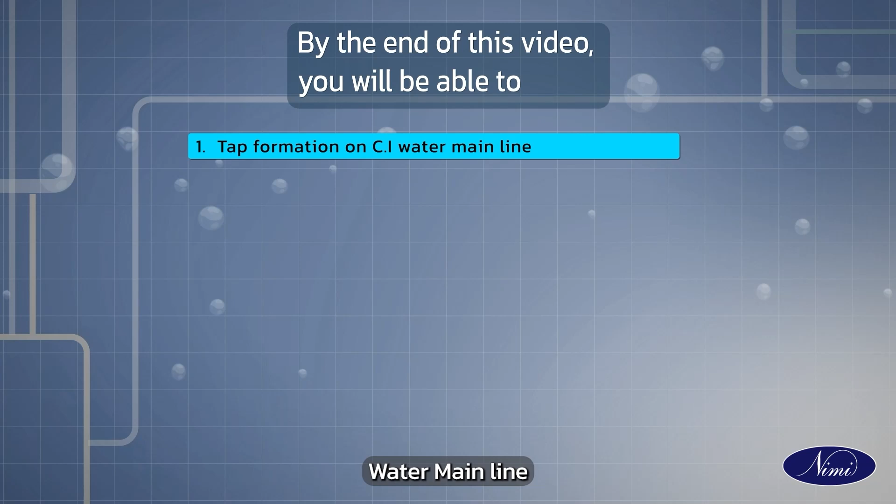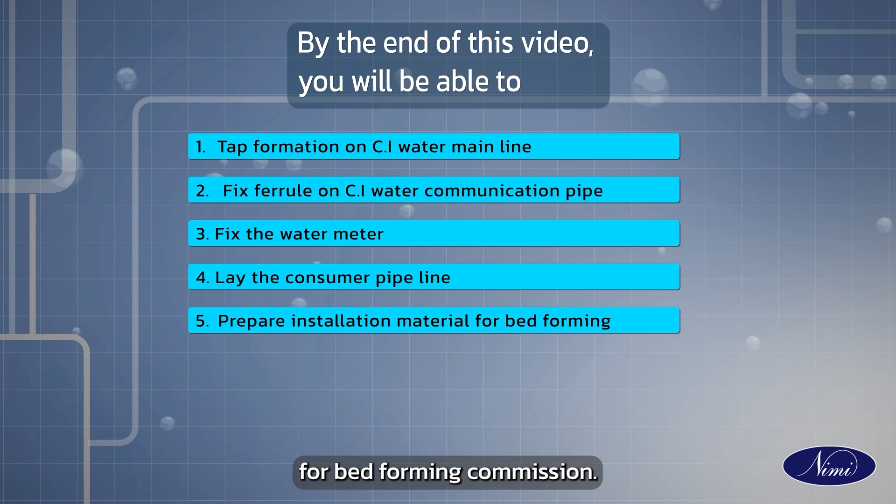fix a ferrule on the CI water communication pipe, fix the water meter, lay the consumer pipeline, prepare installation material for bed forming, commission the centrifugal pump and motor onto the bed, connect the suction line and delivery line,

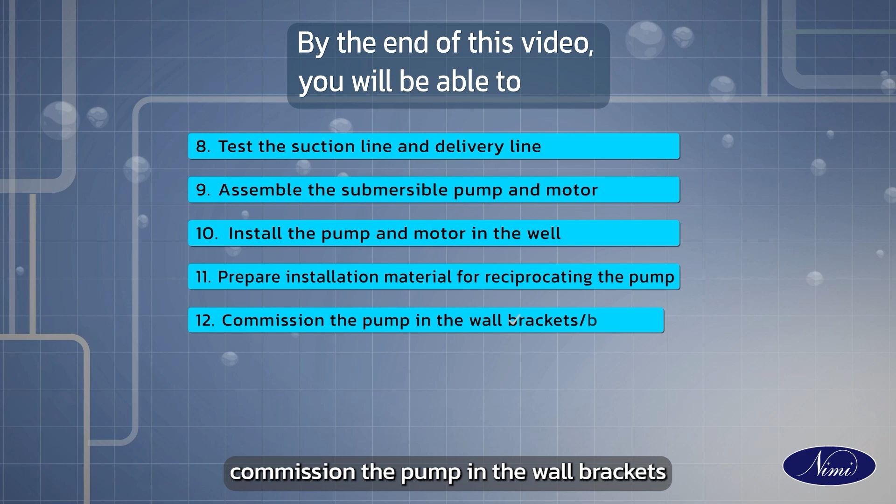test the suction line and delivery line, assemble the submersible pump and motor, install the pump and motor in the well, prepare installation material for reciprocating the pump, commission the pump in the wall brackets or bed.

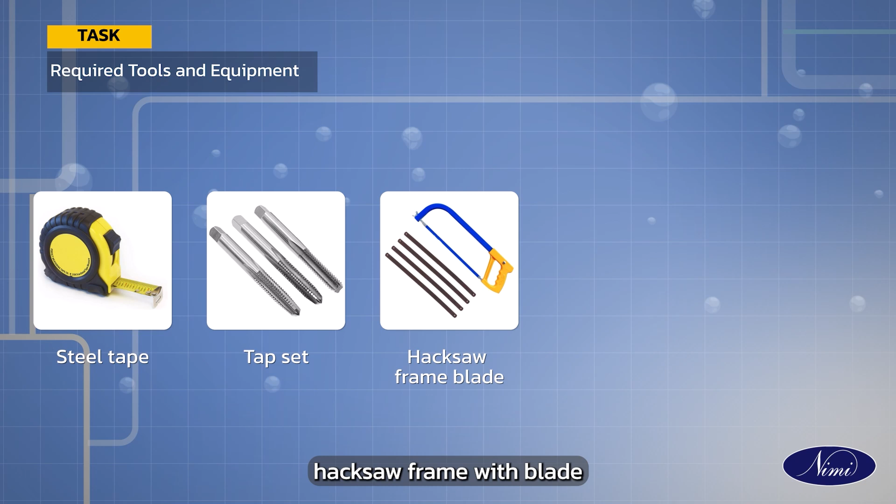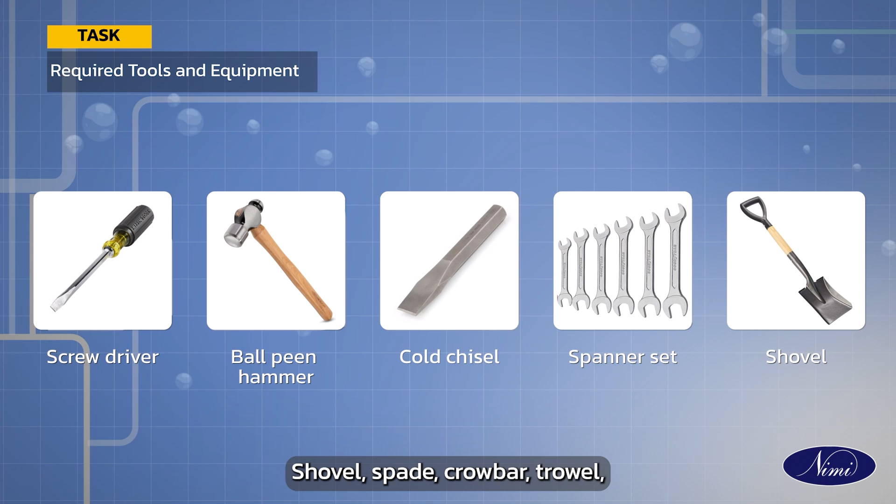Let us collect the tools and equipment required to do this: steel tape, tap set, hacksaw frame with blade, pipe wrench, ratchet die set, screwdriver, ball peen hammer, cold chisel, spanner set, shovel, spade, crowbar, trowel, mortar pan, spirit level, feeler gauge, tin bond,

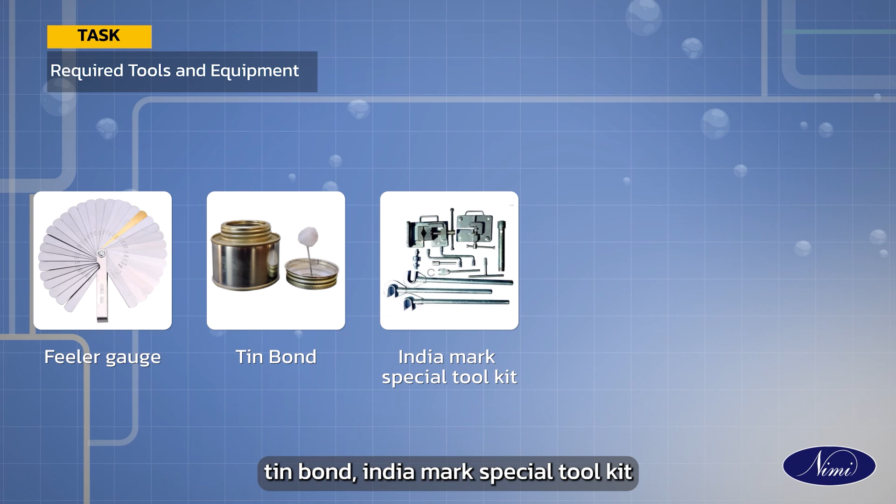India Mark special toolkit, pipe vise, bore clamp, cutting pliers, Allen key, knife or wire cutter, water pump plier, plumb bob, centrifugal pump, motor, foundation template, bolt and nuts, gland rope, reciprocating hand pump, reciprocating power operated pump, monoblock pump set,

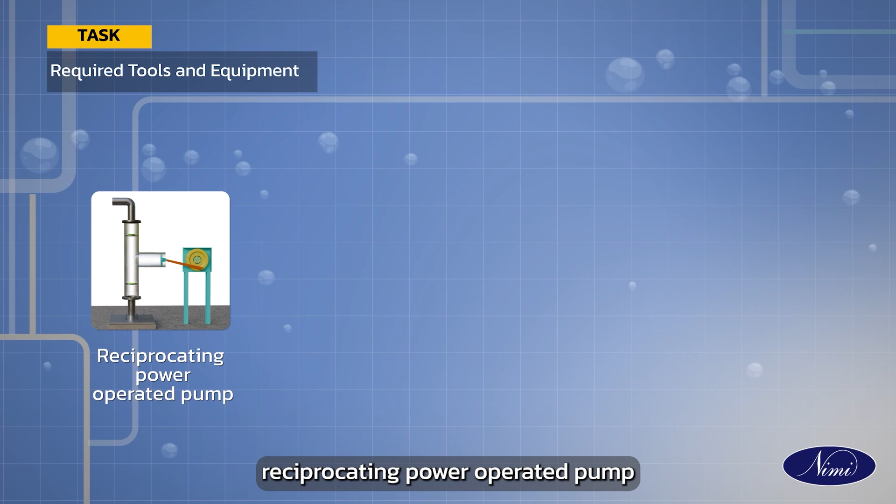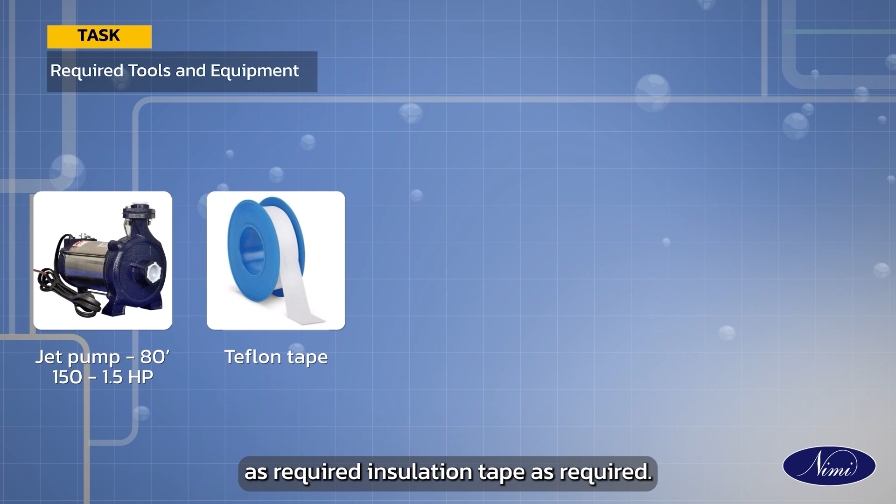submersible pump, jet pump 1 horsepower, jet pump 1.5 horsepower, Teflon tape as required, insulation tape as required, NR valve as required, poly safety rope as required, cable tag as required, GI pipe as required, foot valve as required,

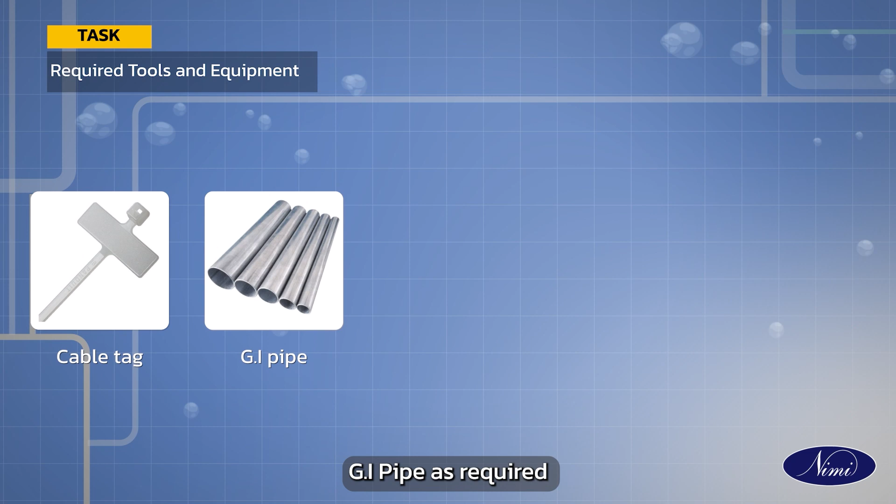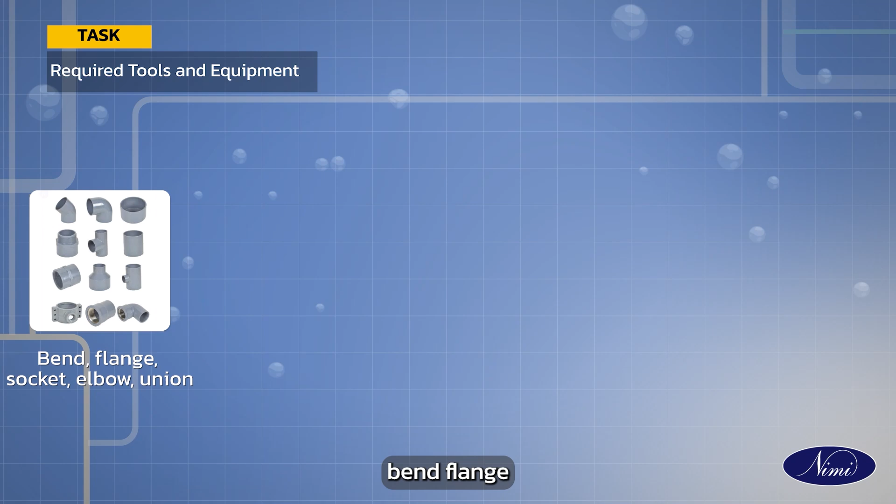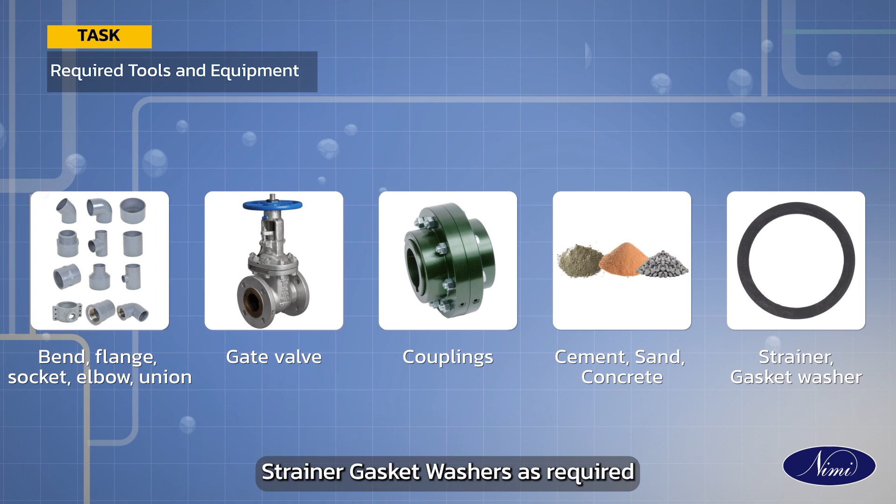non-return valve vertical type as required, non-return valve horizontal type as required, bend, flange, socket, elbow and union as required, gate valve as required, couplings as required, cement, sand, concrete as required, strainer, gasket washer as required, rigid couplings as required,

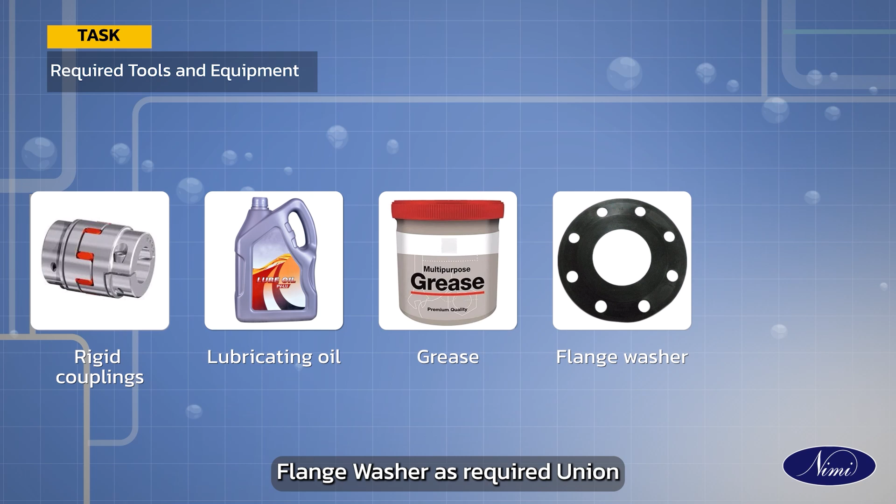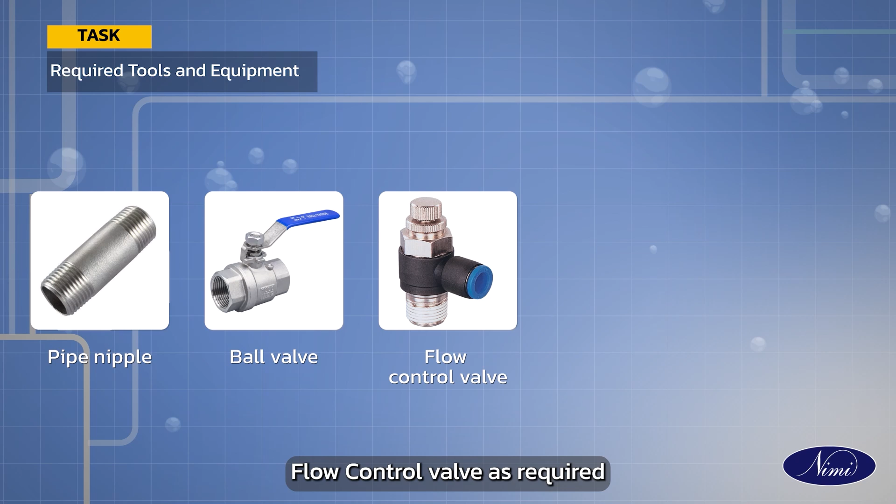lubricating oil as required, grease as required, flange washer as required, union as required, pipe nipple as required, ball valve as required, flow control valve as required, angle and angle bolt nuts as required, saddle piece as required,

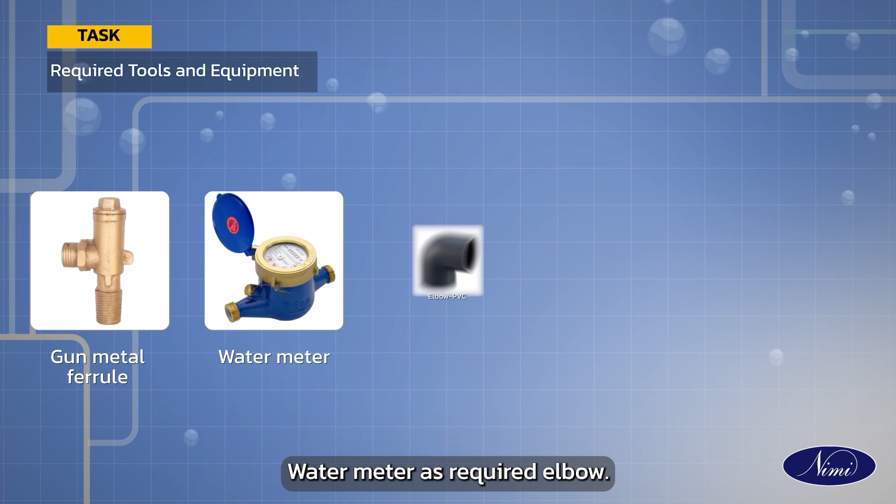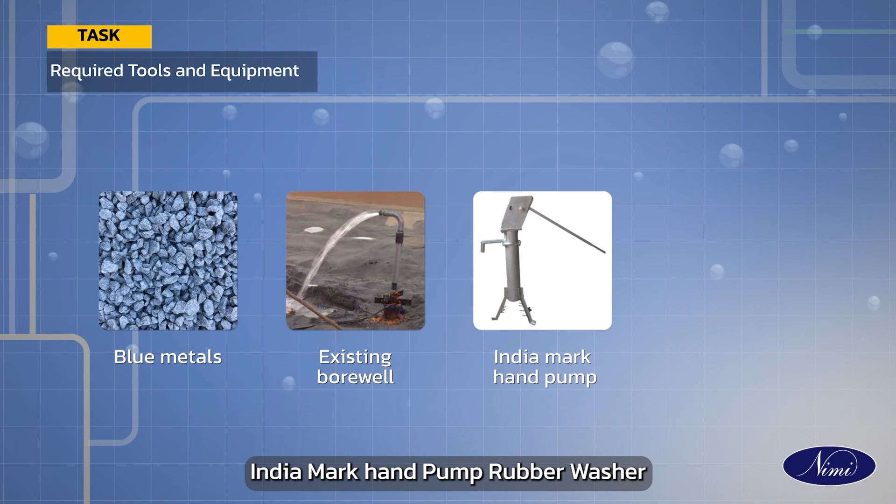gun metal ferrule as required, water meter as required, elbow PVC as required, solvent cement as required, tee as required, blue metals as required, existing borewell, India Mark hand pump, rubber washer.

Servicing and fixing the water meter. Arrange the proper tools and materials. Close the main line valve.

Mark the position for drilling and tapping on the main line. Drill the main line with a ratchet brace. Cut the internal threads with a taper pipe tap.

Connect the saddle piece on the main line. Fit a ferrule to form the necessary connection. Open the valve inside the ferrule and close the tap.

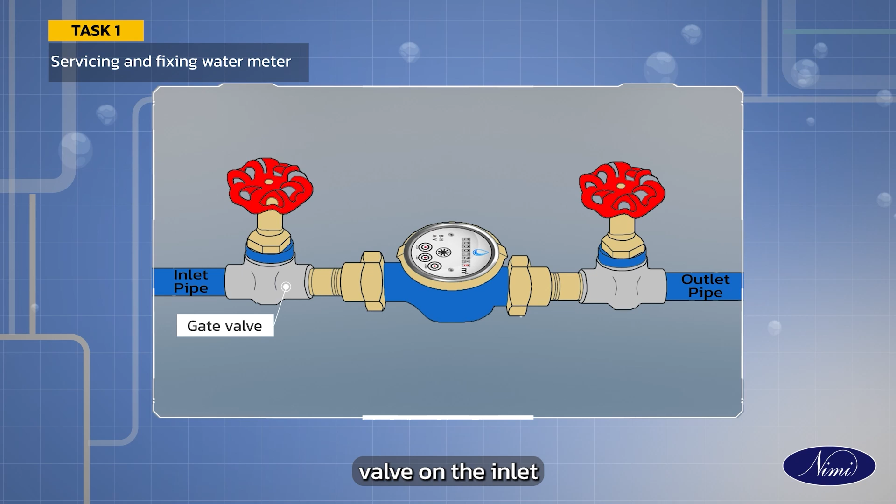Take the service pipe from the saddle piece. Fix a stopcock or gate valve on the inlet and outlet of the water meter location. Close the stopcock. Measure the length of the water meter and the distance between the two unions.

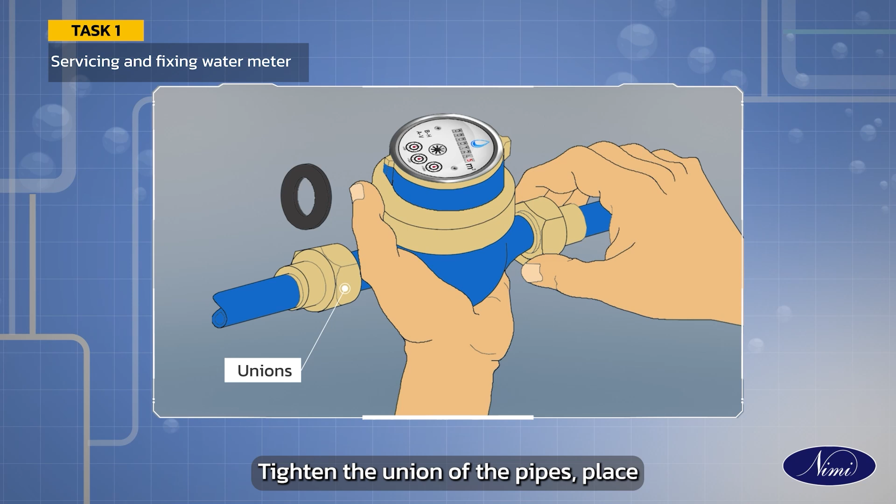Tighten the union of the pipes. Place a soft leather or rubber washer on one side of the meter. Fix the water meter between two unions as per the direction to coincide with the arrow mark on the meter.

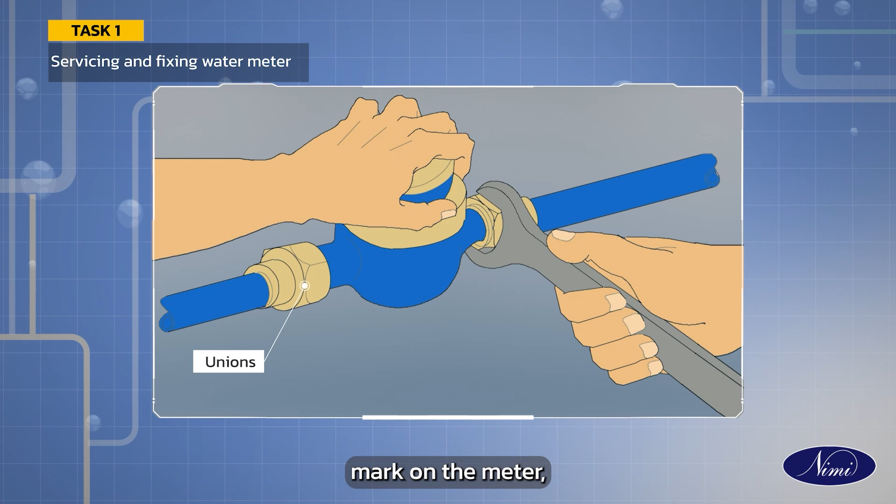Open the valve and check the pipelines. You must fix the gate valve before the water meter.

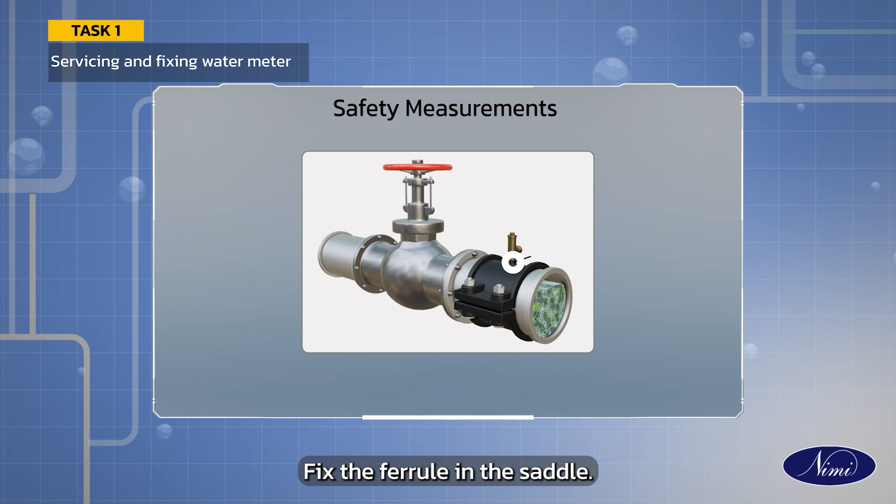Safety measurements to be followed: be careful while drilling the main line, fix the ferrule in the saddle, fix a gooseneck if the line is crossing a road, and connect a stopcock before the water meter.

Installation of a centrifugal pump.

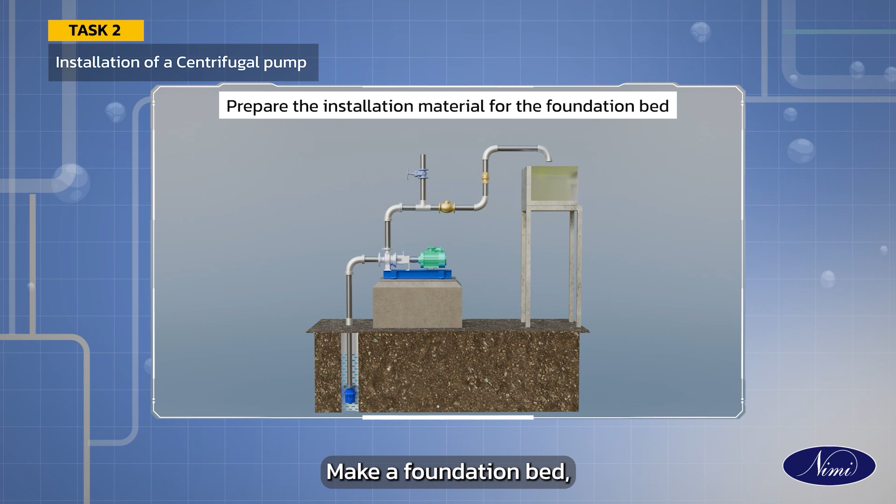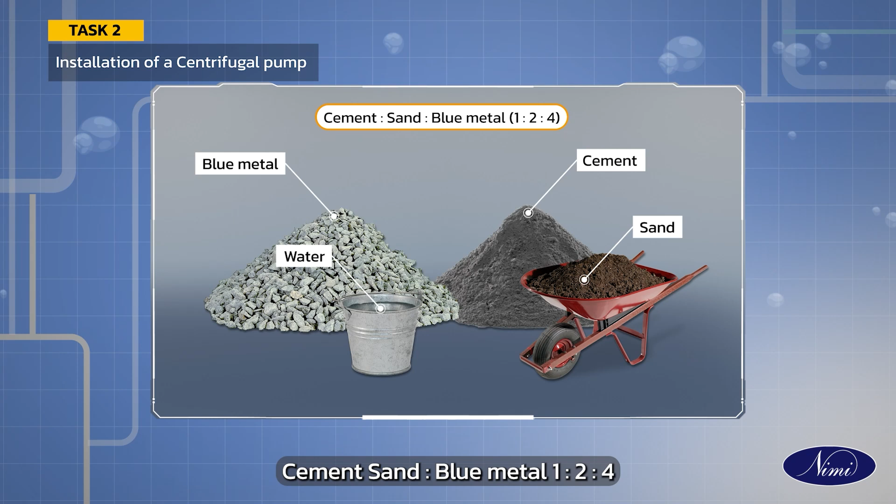Make a foundation bed. Prepare the installation material for the bed. Make a cement mortar as per the ratio 1:2:4, where cement is to sand is to blue metal, is 1:2:4.

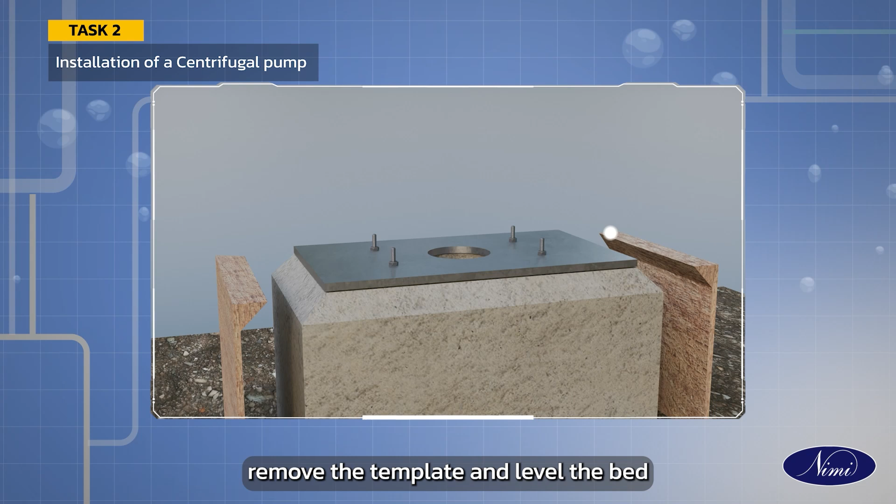Grout the foundation bolt and nut with the help of templates. Fill the cement mortar in the grouted area and allow to cure. Remove the template and level the bed.

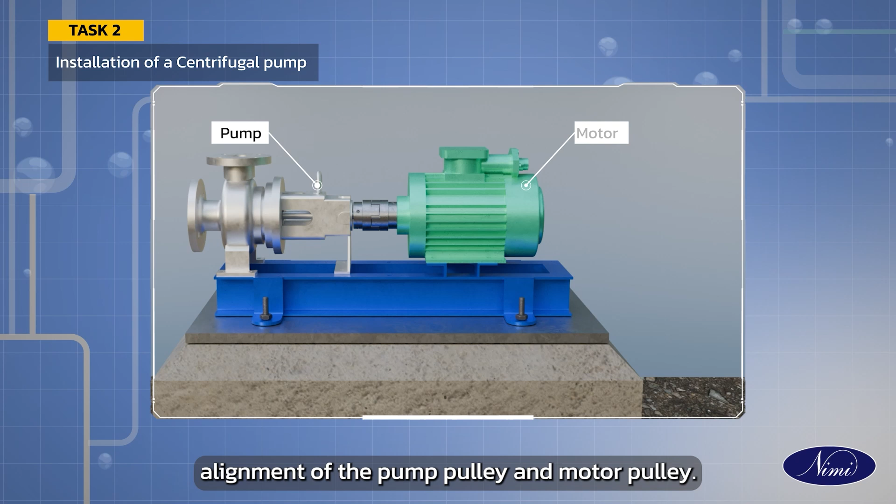Commission the pump and motor on the bed with the help of a spirit level and feeler gauge. Align the pump pulley and motor pulley, and assemble them properly. If not properly aligned, defects may develop: Lovejoy coupling assembly failure, gland rope and bush wear out, and worn out pump bearing.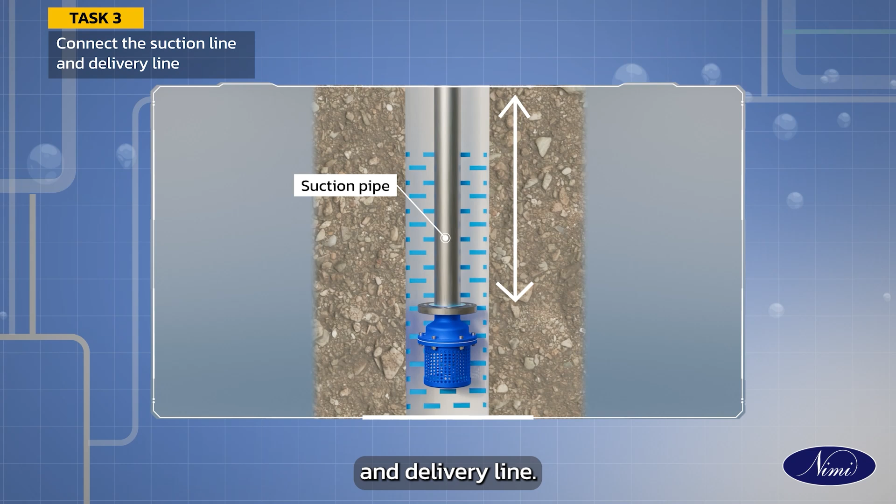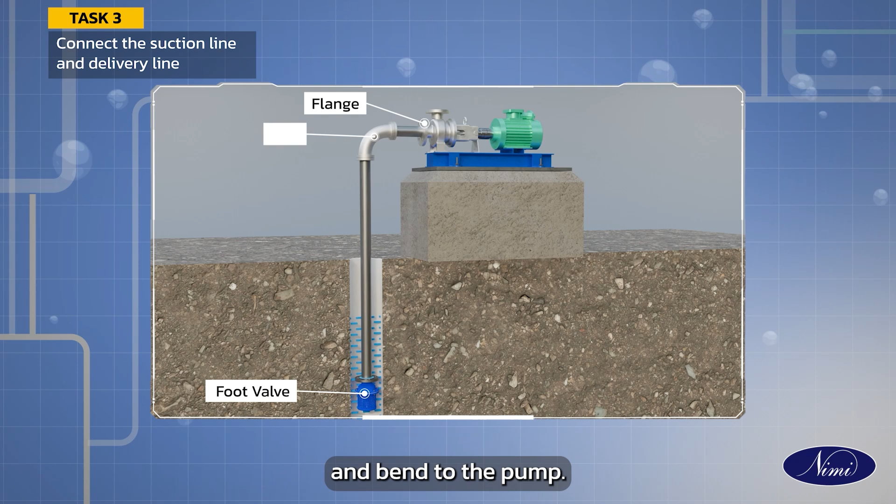Connect the suction line and delivery line. Measure the required length of the suction pipe. Select the required pipe fittings and valve gaskets. Connect the foot valve, gasket, flange and bend to the pump. A foot valve helps to maintain the water level in a suction pipeline.

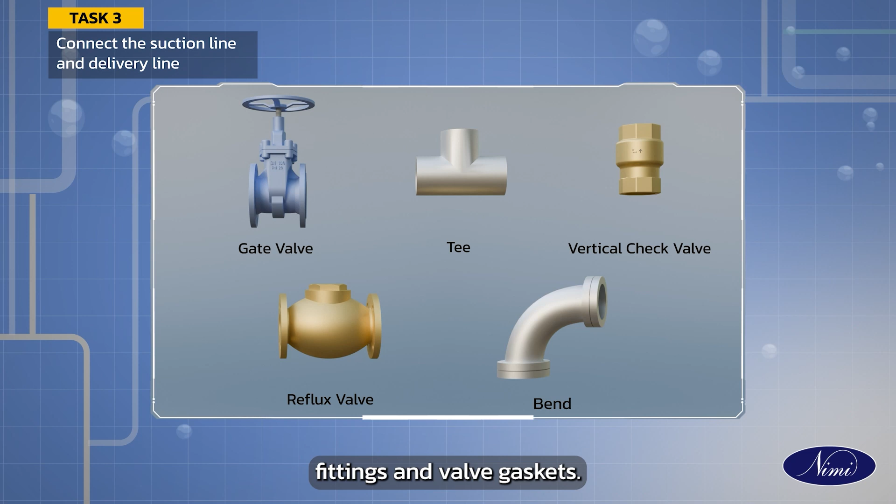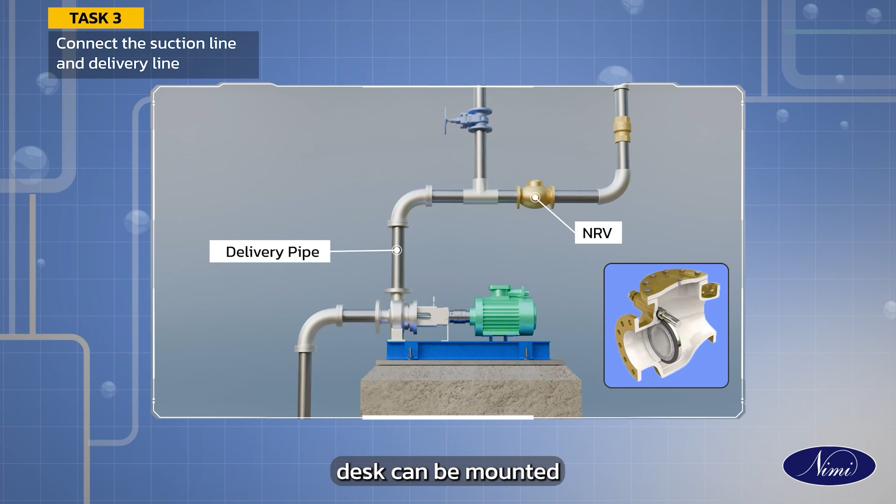Measure the required length of the delivery pipe. Select the required pipe fittings and valve gaskets. Connect the delivery line to the non-return valve (NRV) using an appropriate fitting. Most NRVs, especially those with spring-loaded discs, can be mounted in a horizontal position, which is generally preferred for ease of access and maintenance.

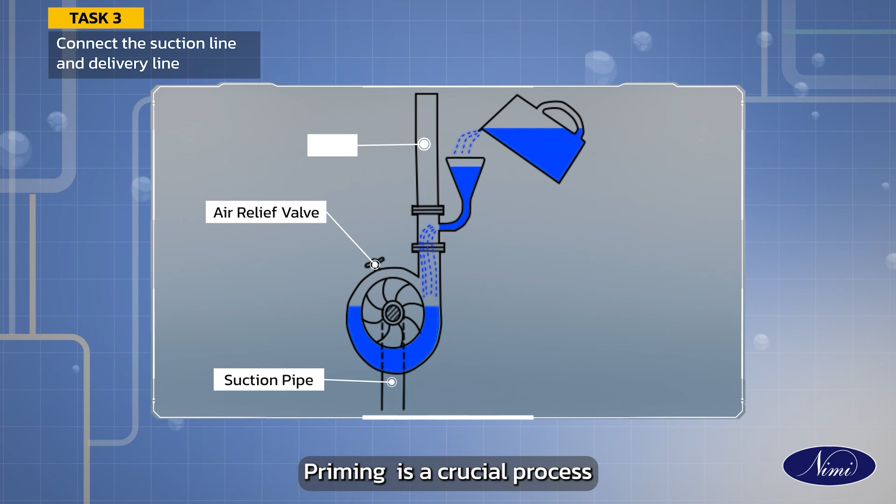Provide the electrical connection. Prime the suction pipe. Priming is a crucial process in centrifugal pumps that ensures the pump and suction pipe are filled with fluid before it is started. Switch on the pump and check the suction pipe and delivery pipe.

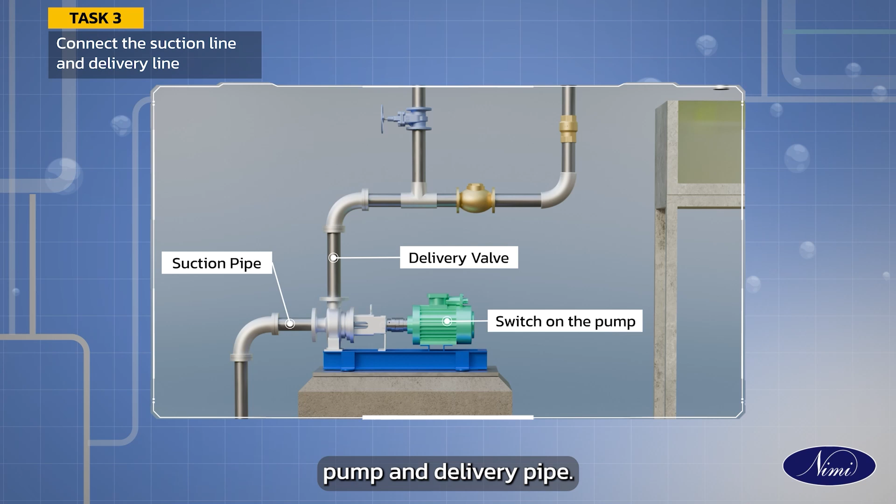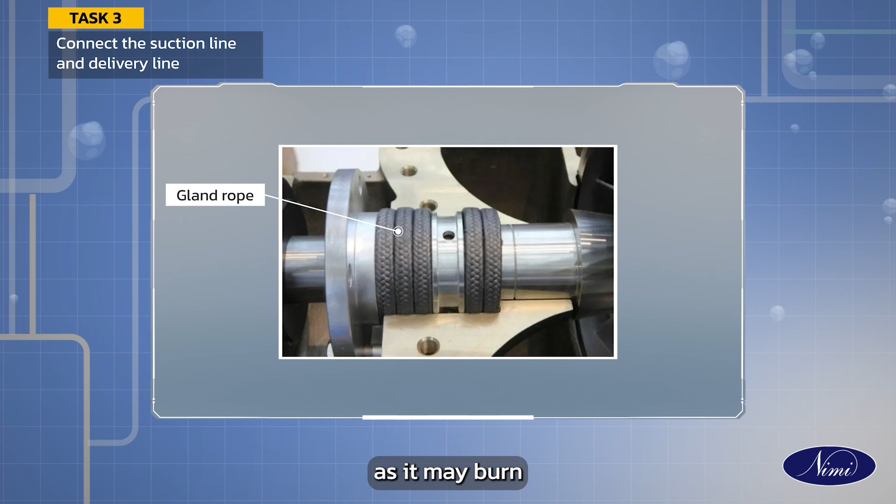Safety measures: use proper hand tools. To avoid dry run, maintain the foot valve position at the bottom of the groundwater level. Do not over-tighten the gland rope as it may burn. To avoid vibration in the system, add lubricants to the bearings as and when required.

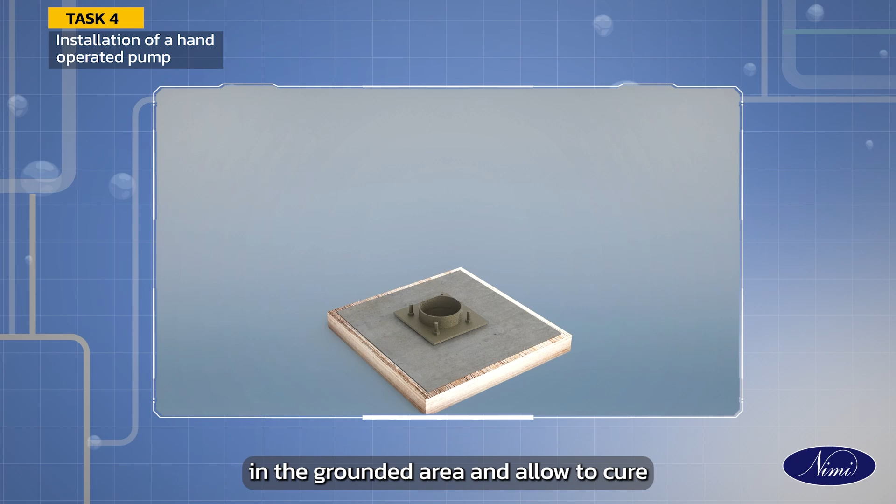Installation of a hand-operated pump. Mark the holes for fixing. Ground the foundation bolt and nut with the help of templates. Fill the cement mortar in the grounded area and allow to cure. Remove the template and level the bed.

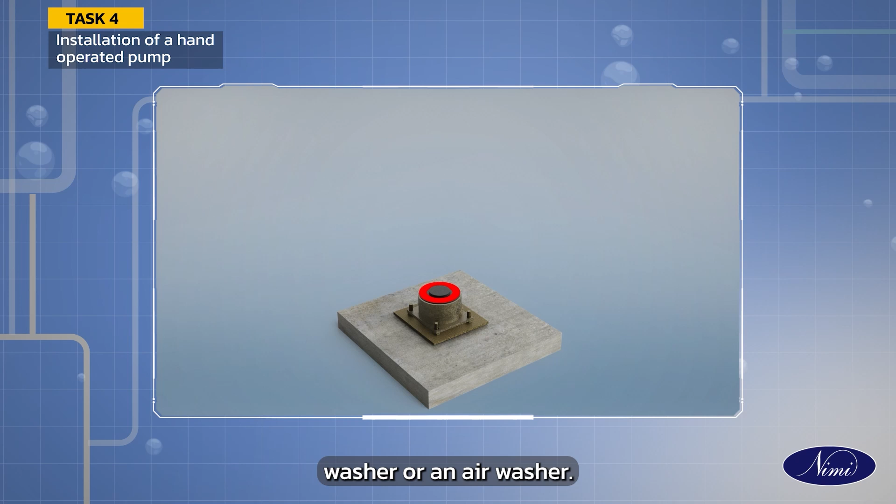Fix the suction pipe with the check valve. Provide the pump base with the weight washer or an air washer. Connect the cylinder on the base with bolts and nuts. Assemble the cup washer with a plunger rod.

Fix the plunger rod with a hand lever. Connect the plunger rod assembly with a cylindrical head. Operate the hand lever in an up and down motion.

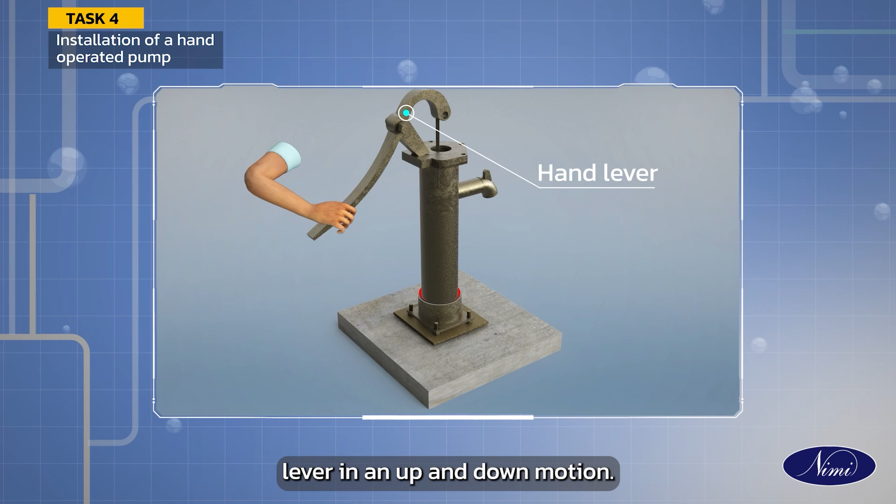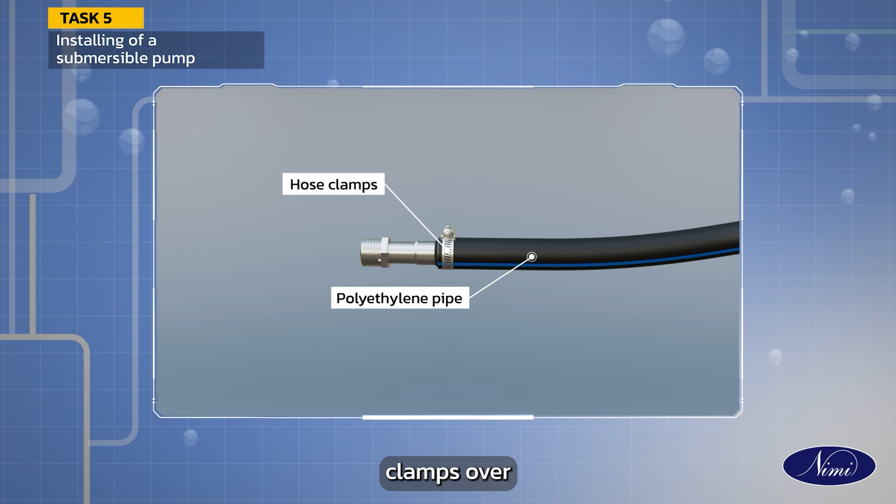Let us look at the installation of a submersible pump. Fix the adapter into the pump discharge end. Fix the required hose clamps over one end of the pipe and tighten.

Apply heat to the polyethylene pipe to soften it. Press the polyethylene pipe over the adapter. Tighten the clamp securely around the pipe over the adapter end.

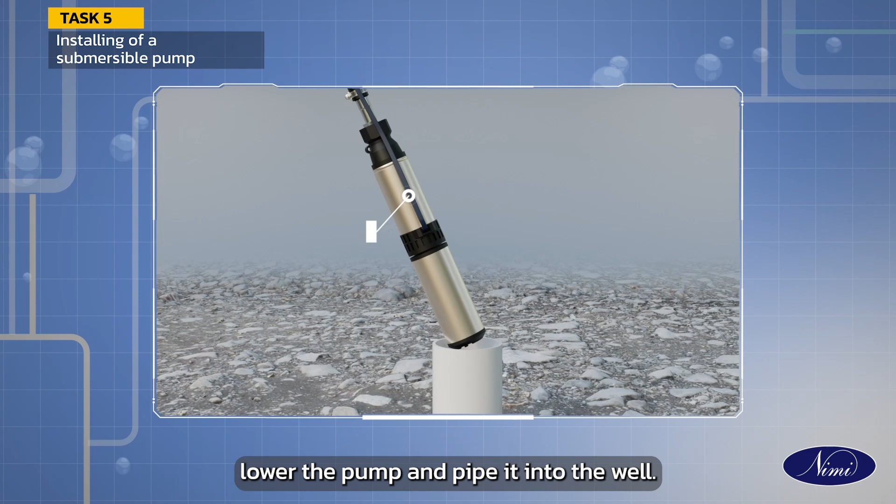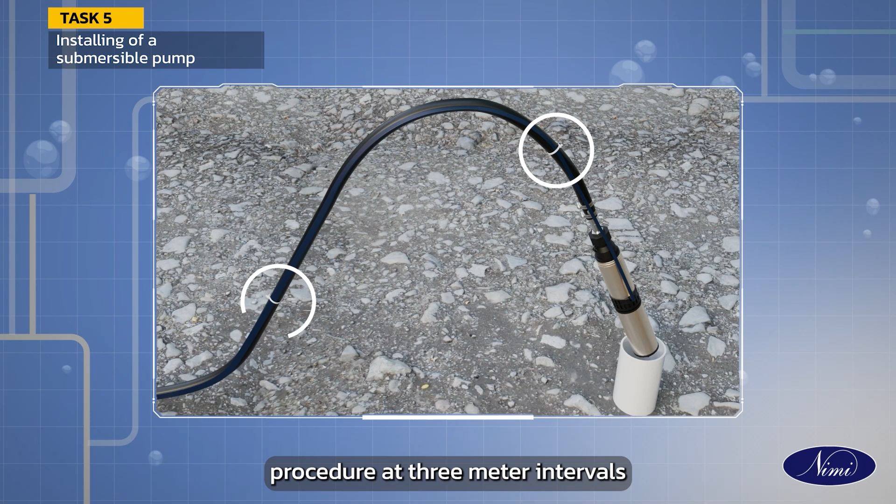Lower the pump and pipe into the well. A submersible wire cable must be secured to the discharge pipe 5 feet from the top of the pump using an electrical tape or snap wire ties. Repeat this procedure at 3-meter intervals along the discharge piping.

Ensure that the pipe has reached the required depth. Send the pipe and cable through the opening in the well seal. The well seal must be vented.

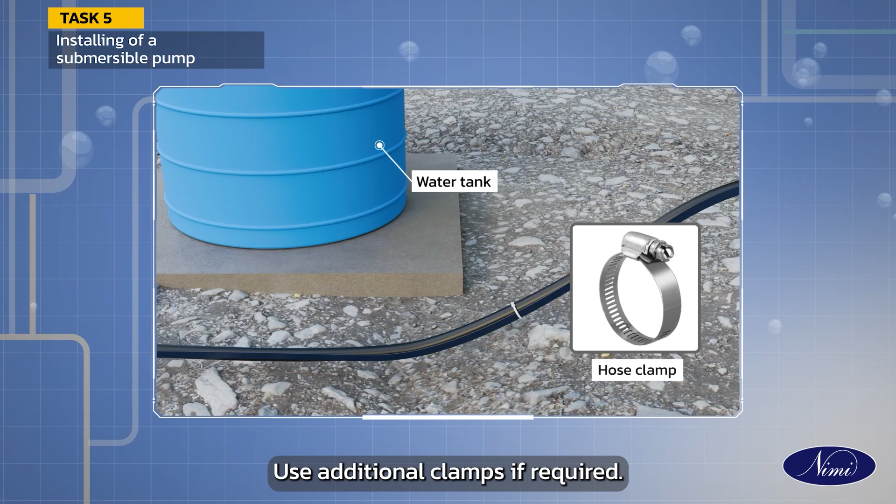Continue the pipe connection to the tank location in the house, using additional clamps if required. Fix the union gate valve and the non-return valve at the end of the delivery line at the nearby bore.

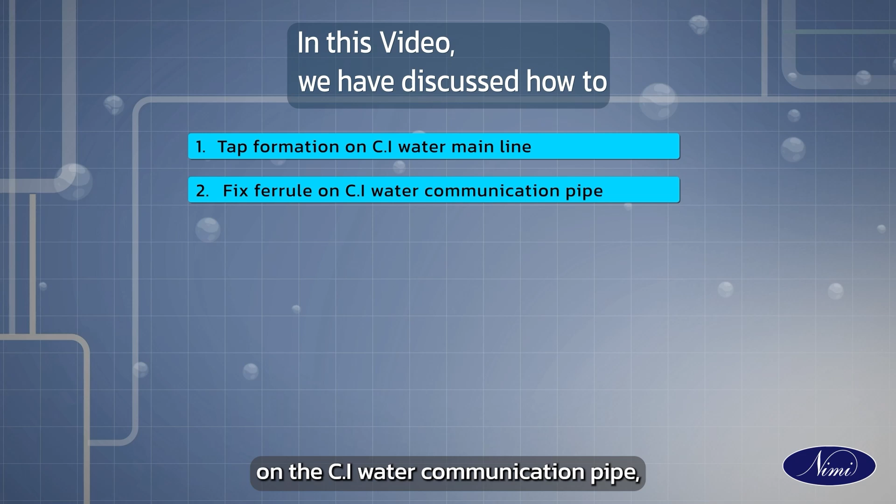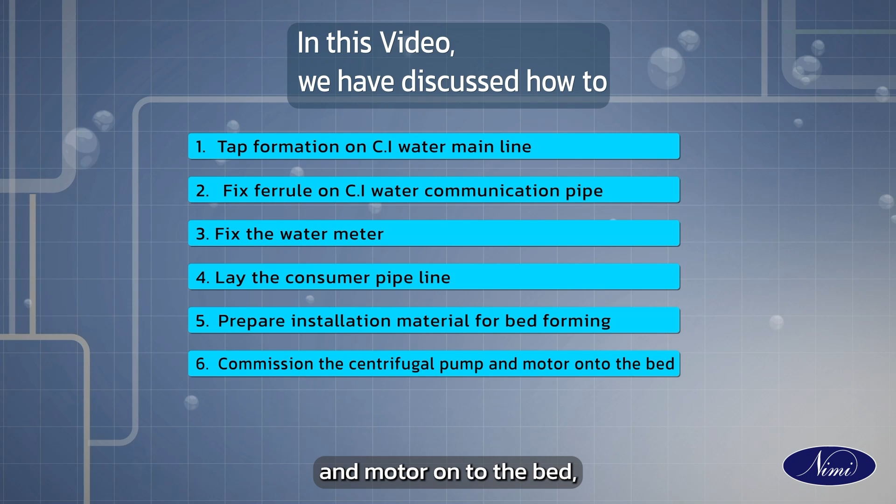In this video, we have discussed tap formation on the CI water main line, fixing a ferrule on the CI water communication pipe, fixing the water meter, laying the consumer pipeline, preparing installation material for bed forming, commissioning the centrifugal pump and motor onto the bed, connecting the suction line and delivery line, testing the suction and delivery lines, assembling the submersible pump and motor, installing the pump and motor in the well, and preparing installation material for reciprocating the pump, commissioning the pump on wall brackets or beds.